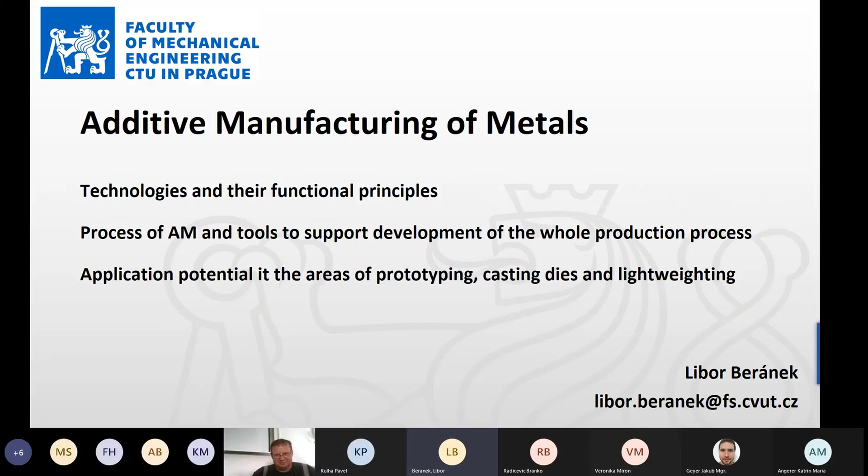Can you see the presentation correctly now? Yes, we can see it well. I had to start the presentation with something maybe a little bit controversial, but we will be celebrating almost 100 years of history of metal 3D printing...

Even if we don't think so, because 3D printing is perceived as something very new, like 10 or 15 years of history. You can see that the first patent regarding 3D printing, of course they didn't call it 3D printing back then, was in 1926. It was a patent aimed at the use of an electric arc as a heat source to generate 3D objects, depositing molten metal in superimposed layers.

This emerged during the time of the construction of skyscrapers in the United States, because the workers spent their whole day there, and the trip to the highest floors took them maybe half a shift. So they figured out that they would basically be living there for quite a time, and because they were welding all these big constructions, they became quite skillful.

They figured out that they could use this welding technology to make 3D objects by placing individual welds where they needed it. They basically made some teapots and stuff like this. In principle, we use these technologies today too, maybe in a more advanced fashion, but I wanted to start this way to show that we didn't revolutionize anything — the skill was already here.

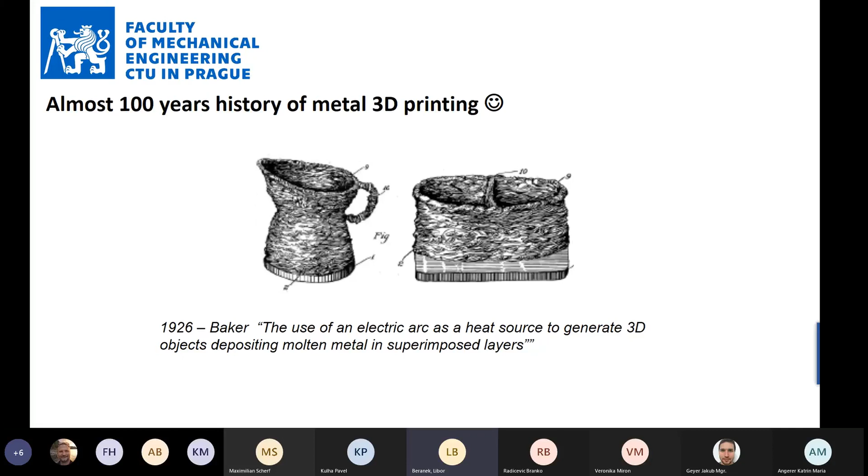If we're supposed to differentiate between the technologies, maybe the biggest problem is that the development in 3D printing, or additive manufacturing, is so quick that there are technologies emerging maybe each year or each few years using new principles. Sometimes they even use the same principles but just bear a different name, basically as a result of marketing purposes. But regarding metal 3D printing, we can start with a different source of the material we can purchase.

We can start with wire, which is a very common material from welding. The technologies connected to it are directed energy deposition, where we can point the wire at the place where we need to add material, and then use different energy sources to melt and weld it. Different energy sources mean we can use laser, plasma, electron beam, or traditional arc technologies like metal inert gas or metal active gas. So this is one way where we can get to metal objects.

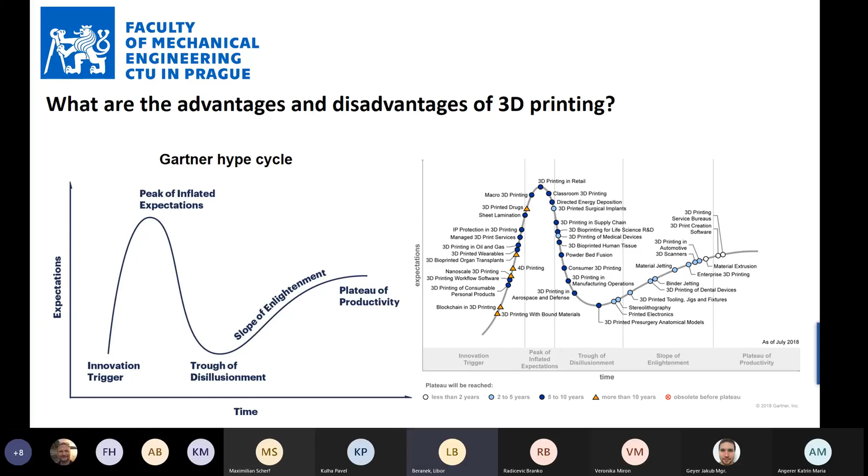Today I would say we are quite certain that additive manufacturing is another production technology, and it will be here with the other production technologies for years to come, and it will not be able to replace those. There are a few aspects that are very problematic to solve regarding 3D printing, maybe even impossible.

What is the biggest advantage of 3D printing? When we take a 3D object, which is quite complex, but we cut it into two-dimensional sections - basically we cut this very complicated object with 2D sections - we will get very simple images.

This is something that I made with my children at home. So we started with 3D printing quite early. The basic principle is that we can reduce this complexity in 3D into two dimensions, where the object can be easily made by just movement of two axes when it's FDM or DMLS technology, or with one picture if it's, for example, SLA or DLP technology for polymers.

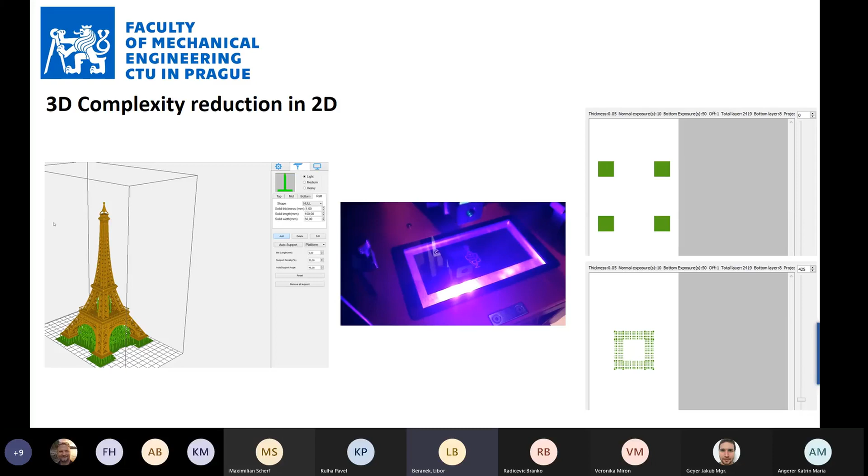So this is a great advantage of 3D printing - that the complexity of the part is not such an issue when we are calculating the price of the product. So we can have quite complicated parts and the production costs will not be so expensive.

But we have to see also the other side, that there is a very limited room for cost reduction in additive manufacturing because of the production times. Usually the production times are on the level of hours.

When we are discussing printing metals using powder bed fusion, some of the prints we made were 70 hours, 120 hours. So we are discussing days or sometimes even weeks of process. And then the depreciation costs are quite significant costs for the part price itself.

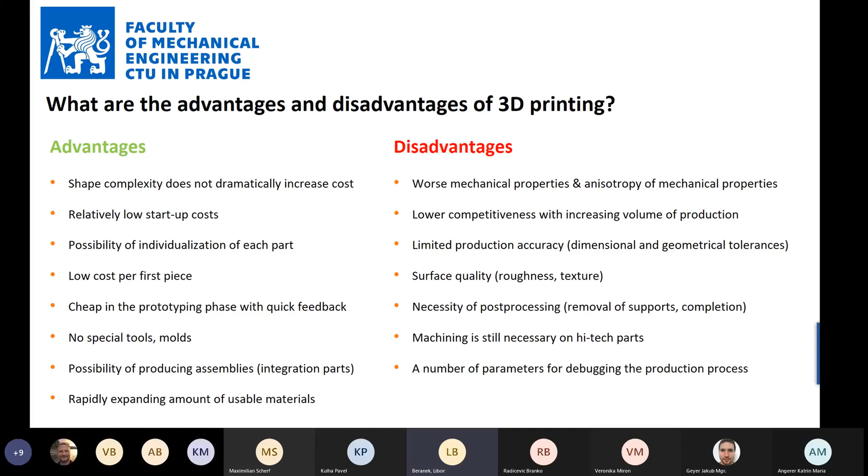Regarding the process of 3D printing, I'll go through this fast, because with 3D printing itself we usually see videos of the printing process, but we don't see the other steps. This is quite significant - it consumes time, and you have to pay for these costs somehow.

So the first step is we have to create a model. There are different techniques for modeling, different software solutions. I would just leave it at that.

Then we take our model, which is parametric, and convert it into some kind of format which can be processed by the printers. Today the standard is the stereolithography STL file, and there are few other formats like AMF, additive manufacturing format.

AMF has some advantages over STL, because usually STL is only a triangulation mesh - it describes geometry, but not material properties, surface texture, or color. Since we have printers that can alter material properties and even surface texture today, we needed other formats which can work with more information.

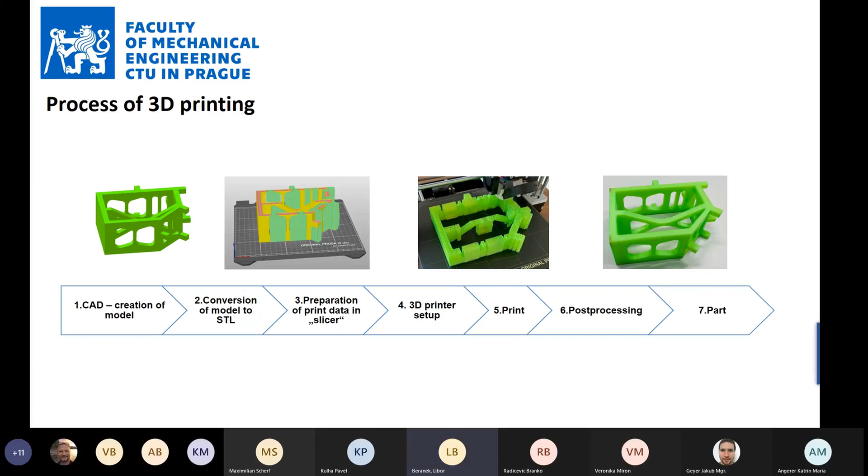I'll go quickly around these steps because this was intended for a very young audience, so this is quite general. But I'll focus on certain parts which are connected to metal 3D printing.

With the printer itself, you're usually working with powder materials which are very small. Those particles are typically from 8 to 50 micrometers, and the majority of particles are somewhere around 30 micrometers. At least this is the powder distribution we use in our printer from GE Additive.

Because of the size of the particles, you have to take some precautions. This is something you sometimes don't see in the videos - there are people in suits working with a 3D printer. It's not too safe to present it otherwise, because the materials themselves are causing health problems.

Today we know that they can cause cancer, so you have to protect yourself properly with some kind of equipment - protective equipment.

So during all the preparations and all the removal of the part from the printer, you're basically working with some breathing system, with some kind of protection, because you don't want to be in direct contact with the powder.

Then there's another aspect. A few of the materials, typically materials having a portion of aluminum or titanium inside - so typically aluminum alloys or titanium alloys - are so-called reactive materials, meaning their surface area is quite large when in powder form.

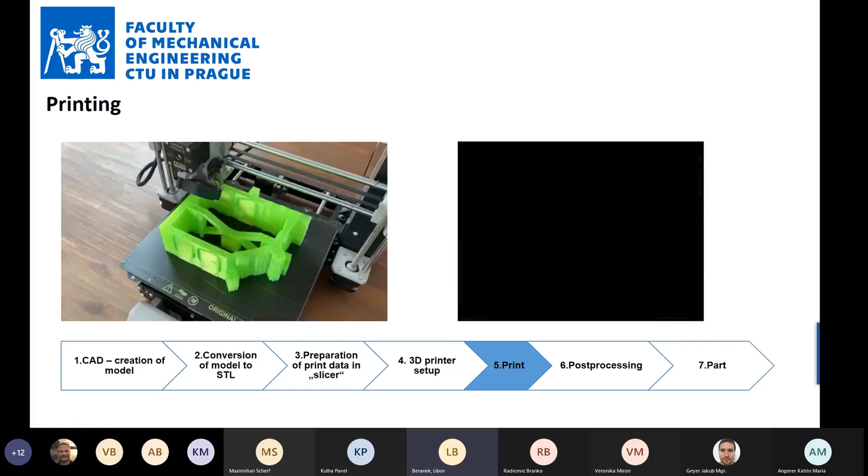Now you can see the so-called recoater. It's basically a mechanism which takes the powder from the powder container and spreads it with a certain width. Usually the building height we use is something like four hundredths of a millimeter or five hundredths of a millimeter, 0.05 millimeter.

The printing process is usually advertised as really easy, but then comes the post-processing, and we already have some experience with production parts made by 3D printing - usually this is the crucial point of the process. If you have correct design, if you've simulated the printing and so on, this is still only half of the way, because then you have to finalize the part. In my opinion, this is something universities are not so prepared for.

When speaking about prototyping production, you don't have a room for automation, a room to make fixtures, to do CNC machining, usually because of the price of the part. So you have to do this manually, and this is something which is lacking, or which we don't talk about enough. When you think about 3D printing, you think about an automated process - you take a model, put it into the printer, and the final part comes out.

Basically you don't need a skilled operator or skilled worker for anything - or at least this is the general perception. But because the part comes out welded to the platform, at the final step of production you now have a human factor introduced there, and usually this can be quite, I would say, fatal for the product itself.

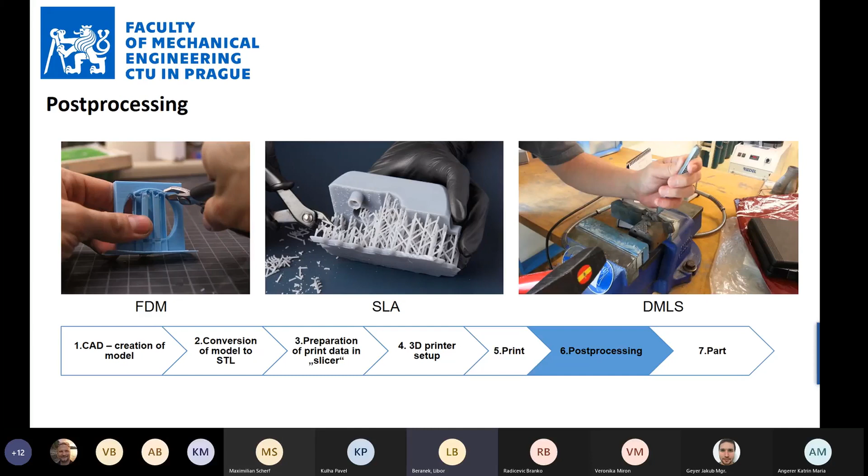Usually students, or when you have a lack of experience, you are very familiar with the software, with different tools which help you prepare the build-up, but at the end you have to take manual tools in your hand to finalize the product, and this is usually a place where you can destroy the whole part, where you can waste, I don't know, a week of printing time. This is something not considered very often, I would say.

So the part finishing or post-processing - this is how it comes from the printer. If the part is a very thin structure, topologically optimized, full of supports, and if you design the supports so they can be removed manually, the operator can clean the part quite easily. But when the part needs better specifications, you're aiming for machining, and the part deformations might be half a millimeter or even bigger.

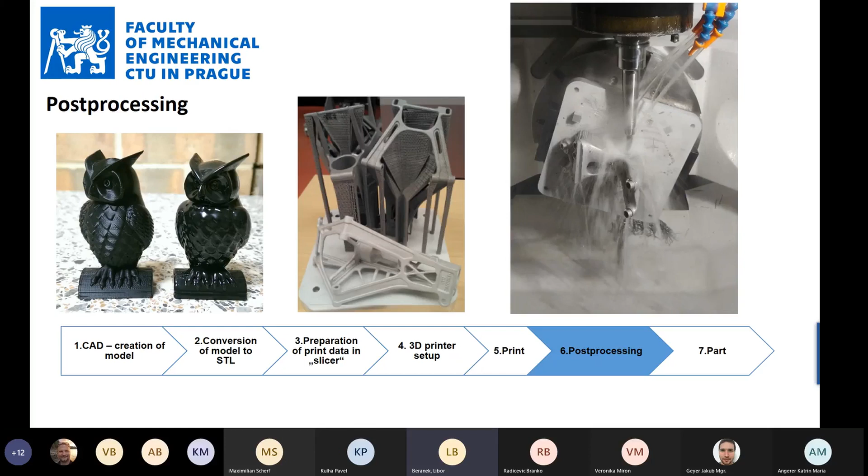And then of course, for the final product, you usually have to inspect it if you want to deliver it somehow.

So this is the general process of 3D printing, and this is what we are trying to offer at the university, at our department specifically. We want to have the whole production chain of additive manufacturing, offering this to companies. We are able to design the part itself using different techniques, including topology or lattice optimization, and we have tools to predict the outcome of the simulation.

We can analyze deformations, potential failures, and collisions with the recoaters. These are typical tasks you simulate, and you can use these results to change the geometry, basically trying to invert the deformations within the geometry. Then you have to prepare the build regarding positioning of the part, generating supports, and so on.

Within metal 3D printing, the supports have one very important property. Not only do they support the structure like in other technologies, but the powder material has very low thermal conductivity, acting basically as insulation. So places surrounded only by powder material can be overheated quite easily. But the supports have the same thermal conductivity as the aluminum part.

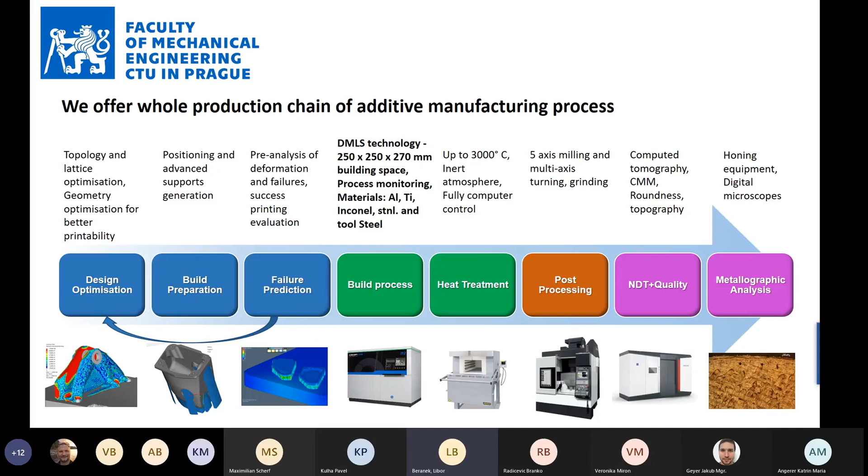Then of course we have quite good equipment regarding dimensional control, surface texture, and non-destructive testing. We can use CT today to see the external geometry, internal geometries like lattice structures, and we can also analyze porosity very quickly.

For available technologies, we have a lot at the university, but for metal printing specifically we have a TruPrint 1000 and a Concept Laser M2. The TruePrint is a smaller printer dedicated to AISI 316, an inox alloy, and the M2 uses DMLS, serving different materials since materials can be changed fairly easily, though some parts need to be replaced when changing material, which can be done quite easily.

So we have printed hot work steel, precipitation hardening steel, aluminum alloys, even titanium alloys, and nickel-cobalt alloys. So we have printing parameters for various materials which are qualified.

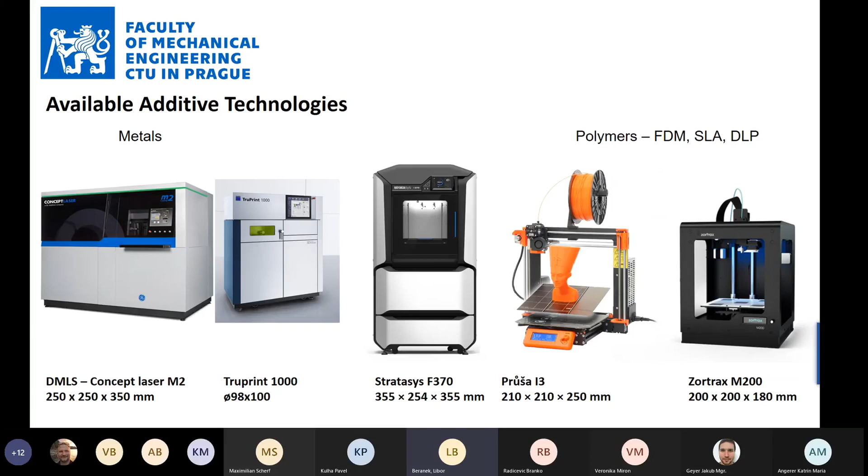Then we have a lot of polymer technologies, which I would skip. We also have some special technologies for additive manufacturing of metals which are not based on the powder bed principle. One is based on wire and arc additive manufacturing - you can perceive it like MIG welding on a robot or some kind of portal. Then there's plasma transferred arc, PTA technology, where you can combine materials with quite different melting temperatures. For example, you can use nickel alloys, cobalt alloys, and mix them with boron, tungsten, and materials with very high melting points. Using plasma, you can make quite resilient surfaces or structures on some kind of material which is usually cheaper.

Then colleagues here from the university developed a hybrid technology called Weld Print, which is basically an integration of wire and arc additive manufacturing into a 5-axis milling center. In one step they can weld the part, with a productivity of about 6 kilograms per hour - quite a big deposition rate for 3D printing. So you can place a lot of material and machine it into the final specifications within one technology. This is called a hybrid technology because it provides both additive and subtractive manufacturing.

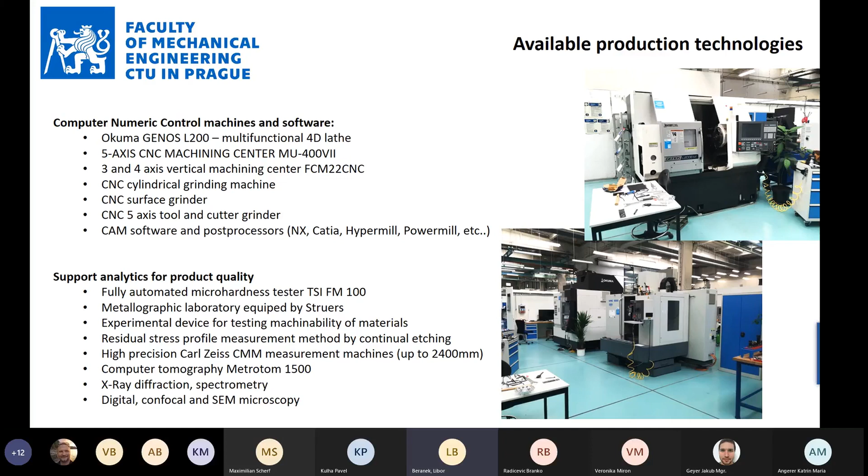Then, of course, regarding post-processing technologies, we have other equipment used to finalize the parts within specifications. This is part of the strategy I mentioned - we want to offer the whole production chain, not only the print itself, but also the preparation stage and the finalization stage.

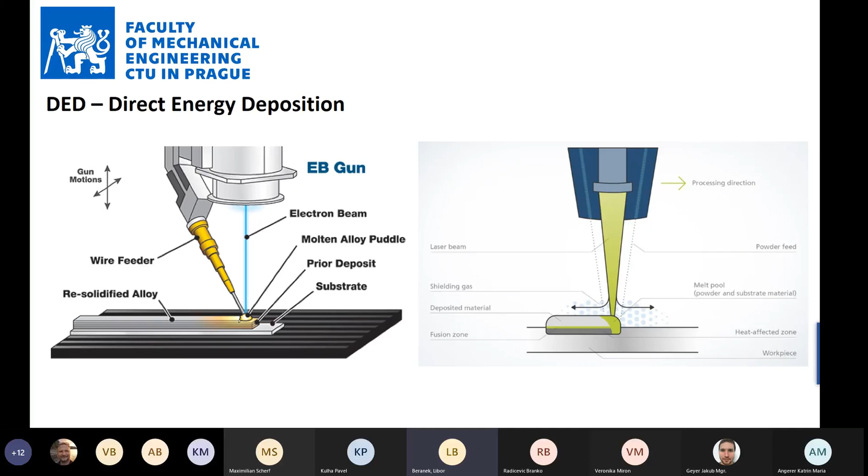Powder bed fusion we have already discussed. Now I would aim for the application, and the difference between direct metal laser sintering and electron beam melting. This technology has a lot of benefits over direct metal laser sintering, because in the aerospace industry, maybe the first aspect they need to solve is material properties. When printing reactive materials like titanium alloys, typically for compressor blades, they value the fact that you can use the electron beam only within a vacuum, and the vacuum itself protects the material. This is one aspect which is quite good about electron beam melting.

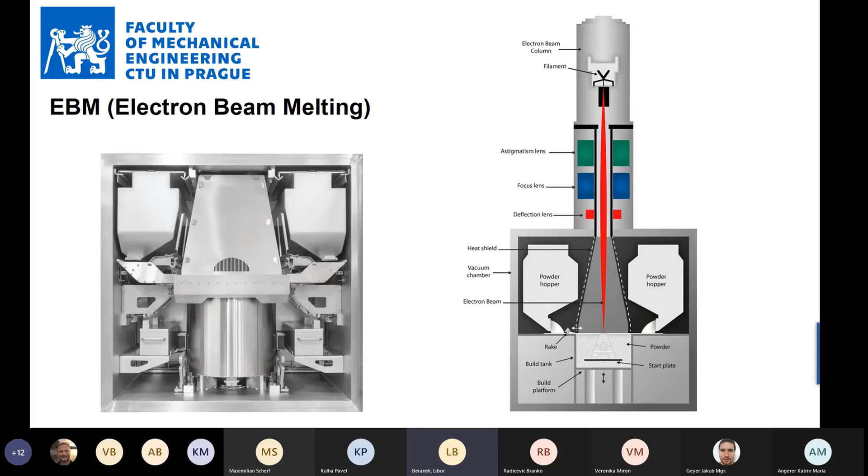It has better precision when you compare form deformations, because deformations are minimized by the preheating. But again, the surface finish or surface quality of the part is much, much worse. The surface roughness parameter RA is usually double or sometimes even triple that of the DMLS technology, so you have to spend more time finishing those parts. This also comes into consideration.

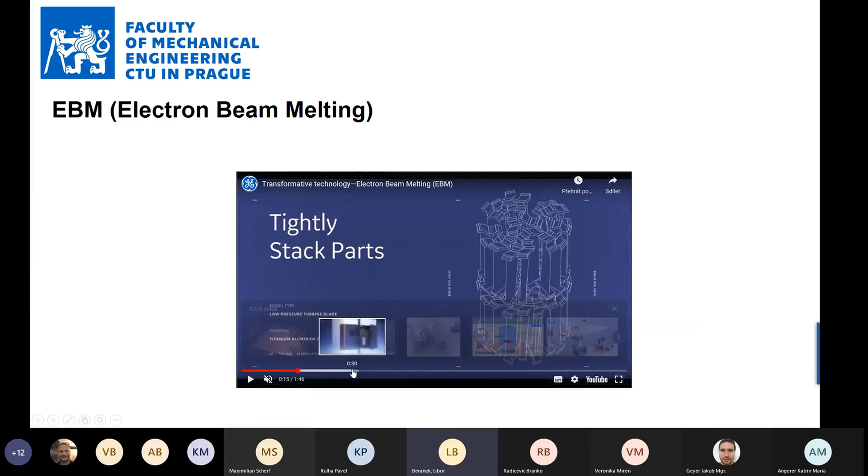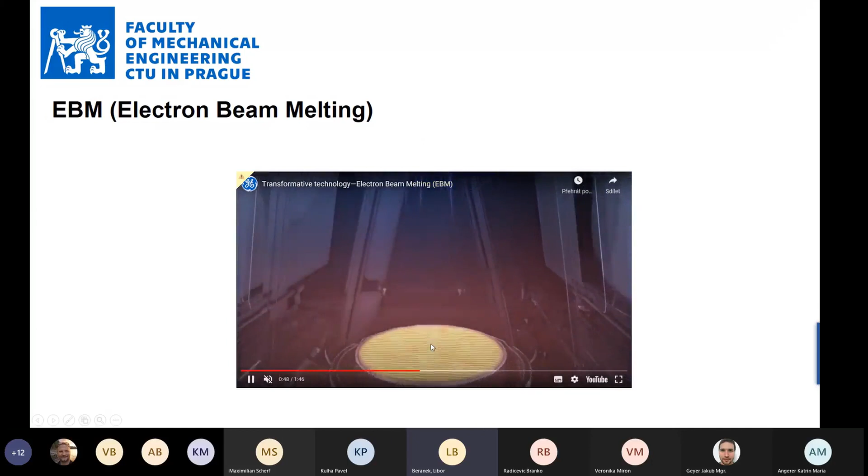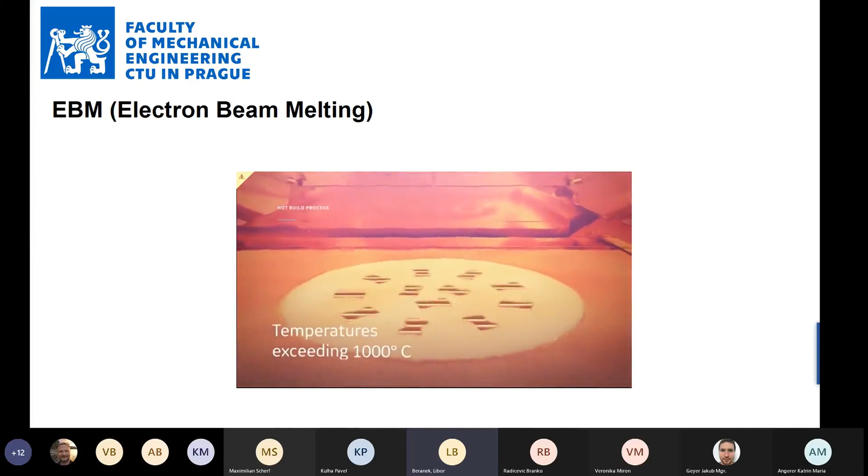You can see for the electron beam melting - if you are interested, I will give you this presentation. But basically, the great advantage is that you really have multiple focal points at one time, because it's very easy to split the electron beam using a magnetic field. So you can preheat the whole bed and then do several parts at once, making the technology very productive. But on the other hand, you are working with vacuum technology, and you need quite a big vacuum, so the maintenance costs and so on have to be calculated and considered.

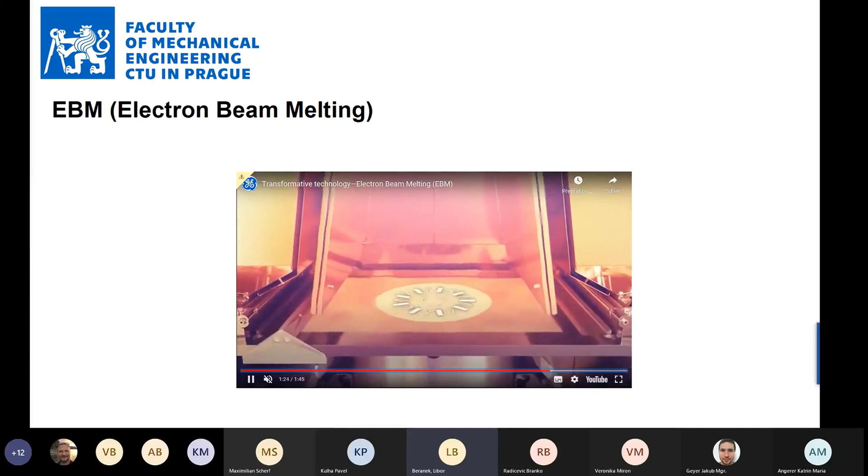Focus of our team is basically we are trying to transfer the whole know-how about the process from the design phase up to the inspection phase into the industry.

So these are some parts that we have made historically. I would say usually you see the final part, but barely see the parts right away from the printer.

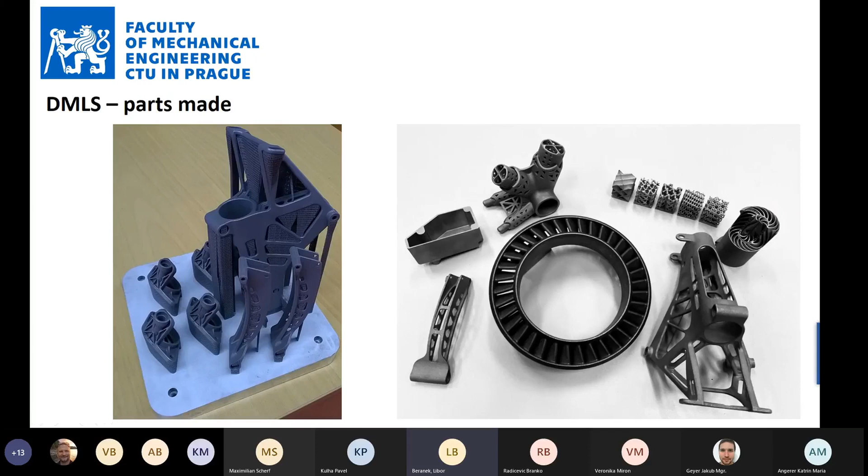You have to consider that usually when the print finishes, this whole powder bed is basically at the bottom of the building chamber and it's full of powder. So only the cleaning of the build plate like this takes you 1 hour, and you are 1 hour within the protective suit. And it's a job, again, very human dependent.

Regarding the simulation or prediction of failure, this is something that comes into play when you have asymmetrical parts or parts with very thin walls, because usually the most common problem is that the thermal history of the part will deform it, causing it to rise above the powder bed.

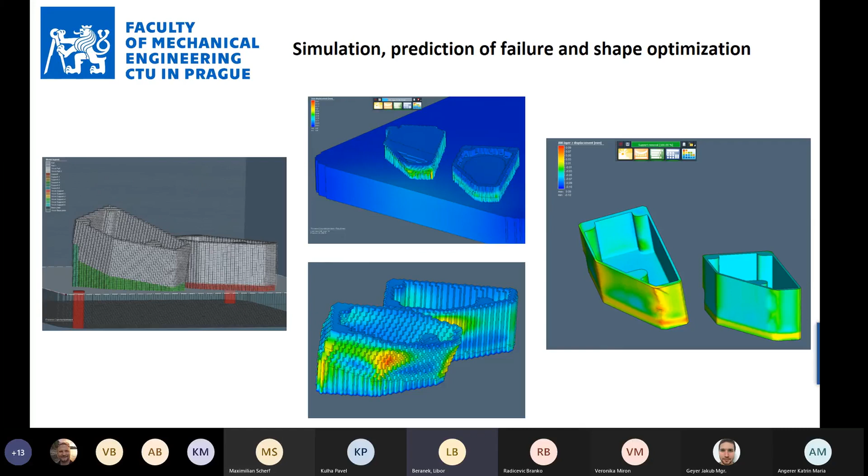This is the moment where you can easily have a collision with the recoater system. So you have to be very careful that the part deformation doesn't exceed a certain limit, and that these deformations don't come out of the powder bed, because then they will be higher than the level where you're printing, where you're moving with the recoater, and you can easily hit it, causing a mechanical collision of the production tool.

Regarding inspection, as I mentioned, CT is a very productive technology which can help you gather information about the outer shape, and also helps you inspect inside the part without destroying it. So it's a typical technology for non-destructive testing.

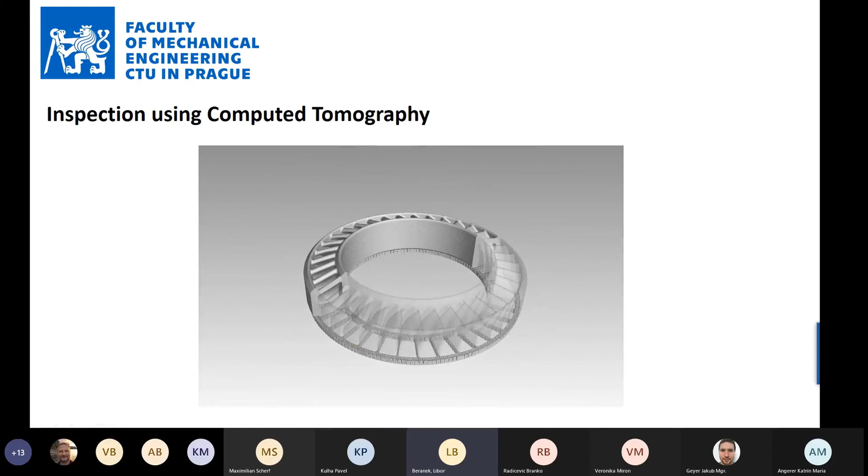Also worth mentioning, all printed parts have some kind of porosity. Usually we are at a level under 0.1% porosity. But when the printing parameters are not set properly, you can be not at 0.1%, but at the level of a single percent or sometimes even higher.

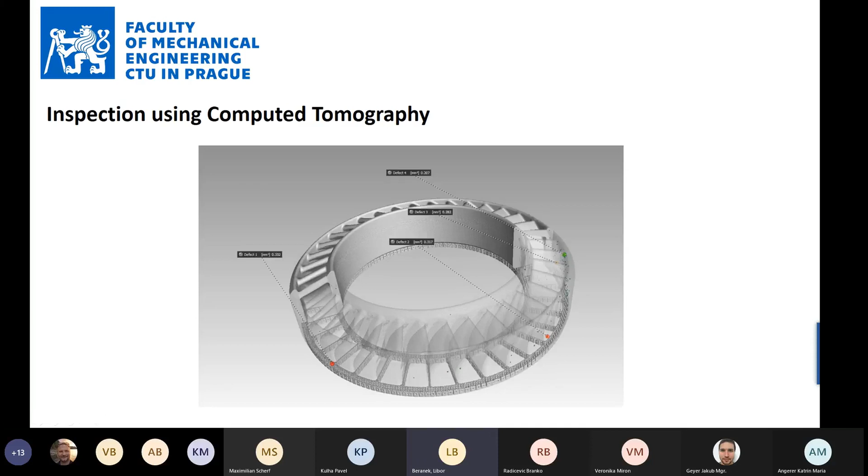So this is SE10 Mg alloy. You can see the porosity and defects here, because we printed it quite fast, so there are pores within the tenths of cubic millimeters.

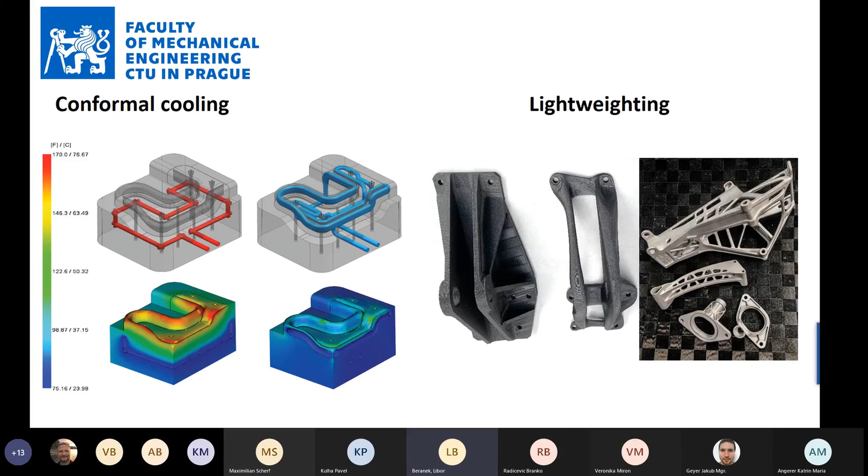Regarding application, there are two areas we are aiming at: conformal cooling and lightweighting. Lightweighting is for aerospace or car racing. Conformal cooling is for injection molding or high pressure die casting.

Within Škoda Auto, we have some history of developing inserts into the molds to prevent porosity problems. So this is basically the conformal cooling inside an insert, which was placed within one part of the mold. This is a quarter of the mold for the engine head.

And the next step, I would say, is this complete piece of the mold. This is 1/4 of the mold already made with 3D printing, with conformal cooling, and already with some experience from application in serial production.

And we can say that this has some disadvantages over traditional materials. The porosity of the printouts affects the lifetime of the part, and you have to think about it when designing the conformal cooling.

You have to think about how to repair it, in certain inspection periods. So you can make very complex cooling channels, but then you have to also think about the possibility of repairing these channels.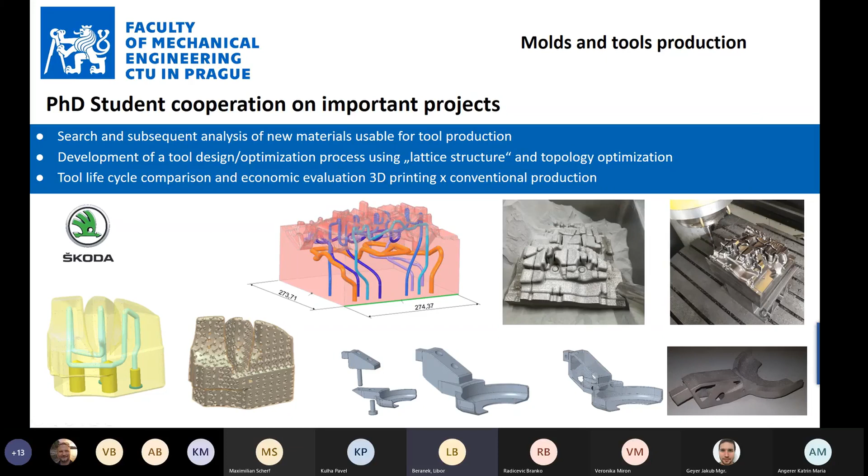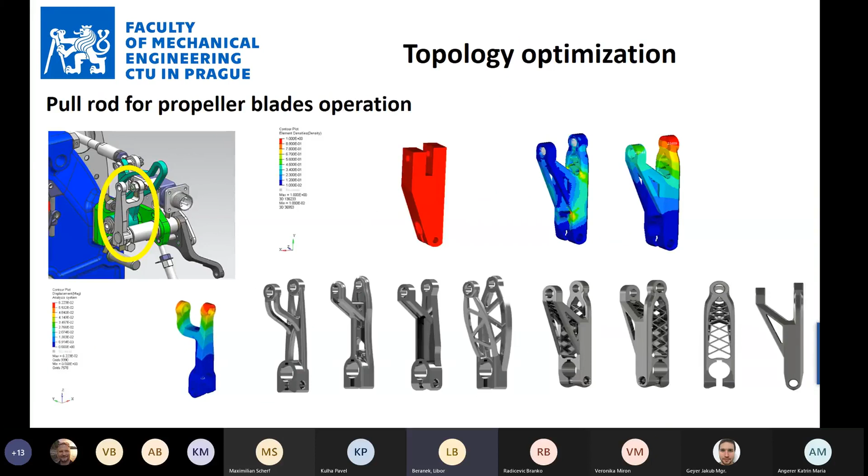So this is basically everything from my lecture. If you have any questions, you may ask. I have also prepared some models for economical calculation, but I'm not sure if you are even interested in that. So I would like to ask you, if you are interested in anything, you can ask freely.

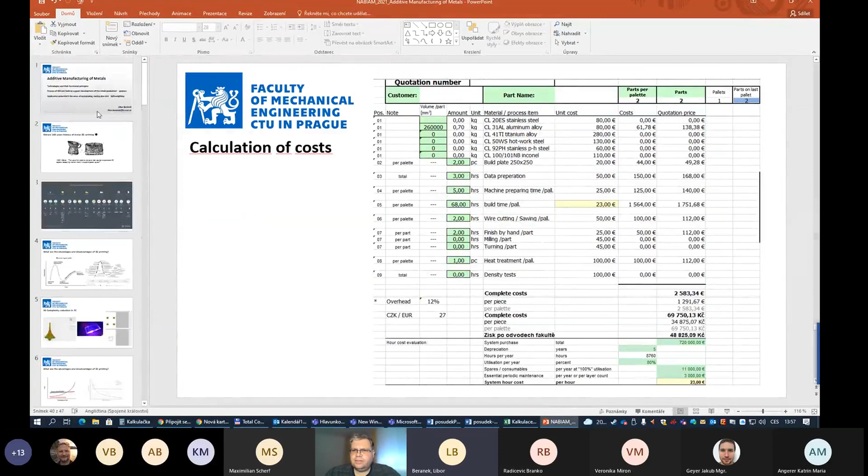Yeah, there is one from Jakub from the University of South Bohemia. So Jakub, please.

Okay, so first of all, thank you for your presentation. And actually, I have several questions prepared. However, since we are a bit behind schedule, I will limit it to just... sorry for that, sorry to my colleague.

So first, I'd like to ask, because in plastic additive manufacturing, it is often said that we are basically a bit behind schedule, like 10 or 20 years. And usually manufacturers said that they had to wait for some patents to expire to be able to produce machines for, let's say, hobbyists or even for the industry. So I would like to ask if there is something similar with metal additive manufacturing. If there are some limitations regarding patents, or if we are still waiting for some patents to expire, or how is the situation about this?

Well, take this as some informed opinion, maybe it's not true, but regarding the polymers, basically it's all about the heating of the chamber, and this was patented by Stratasys, and I would say that patent finished something like 5 years ago. So now a lot of producers can make, I would say, heated room or heated printers, which is much better for the quality.

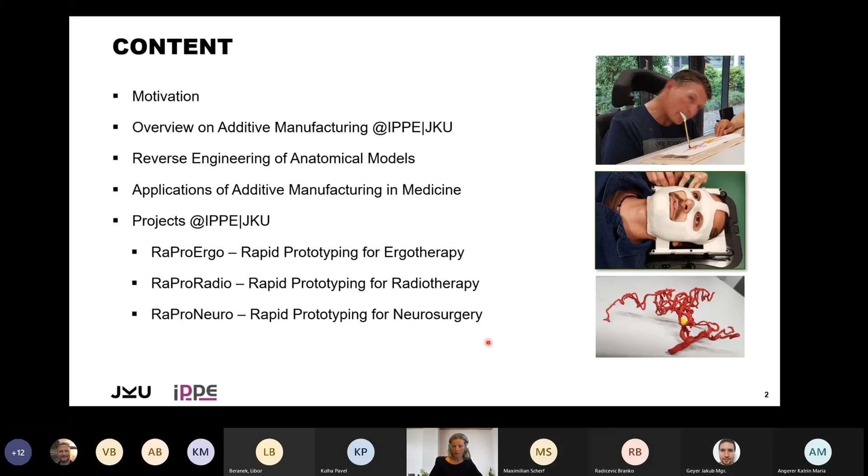Main advantages we already heard, but as a repetition: for us, mainly the high design freedom is the beneficial aspect. We can create free-form shapes. When we talk about medical applications, we have human anatomy.

When we look at this blood vessel of a brain, if you think of conventional manufacturing techniques, there is, to my knowledge, no manufacturing technique that would be able to produce this, as you see it here, printed in one piece. As we also heard before, a lot of support structure was removed there.

This high design freedom and the freeform shapes allow us to talk about personalized medicine in the future. Toolless production can reduce the cost for prototyping and also production of small series. It can even shorten time to market for product development, and it can also shorten production time itself because you don't have to wait for the tool to be manufactured.

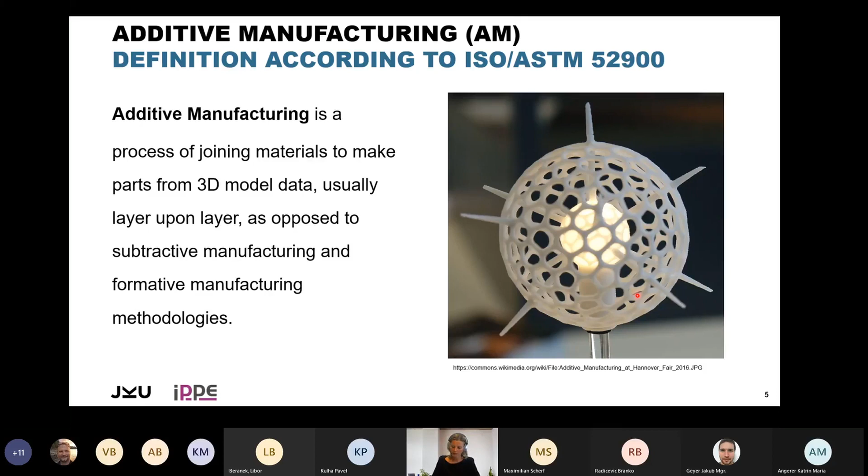And you see here again this complicated shape that you wouldn't manufacture otherwise. So additive manufacturing really has very special applications in this field.

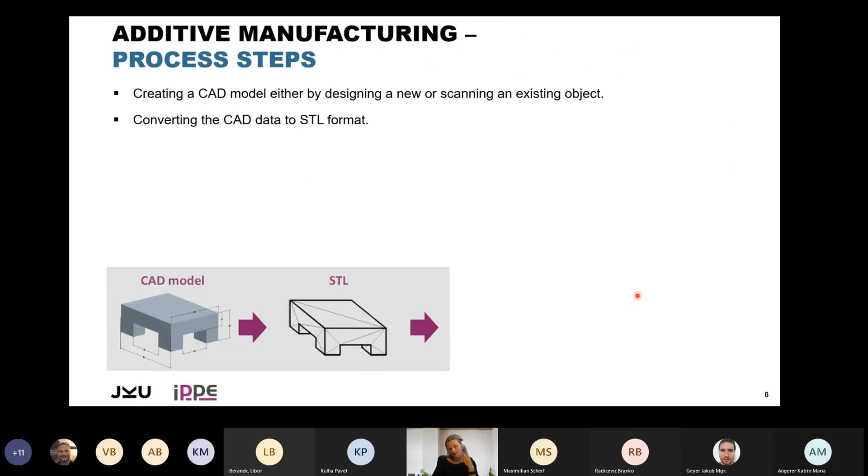The process steps we already heard, so I will just quickly go over them. We have our CAD model. We need to create a printable file, the STL file—standard tessellation language—and then we slice it into thin cross-sectional layers.

Sometimes we need to create support structures. In FDM, sometimes it's possible to also print without support structures. And then the building is happening. And of course, as mentioned before, a lot of post-processing in some cases.

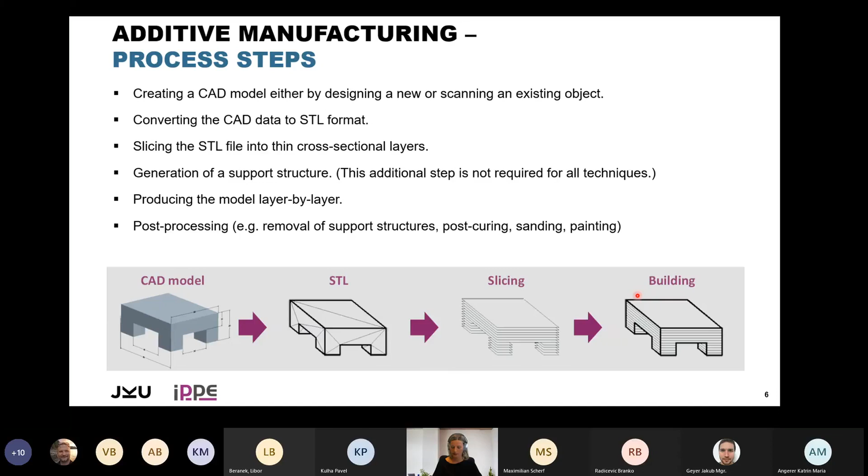Removal of the support structures is one thing, but also for photopolymers, post-curing is often necessary, and in general sanding and painting to get the surface quality you desire for your small series or prototype.

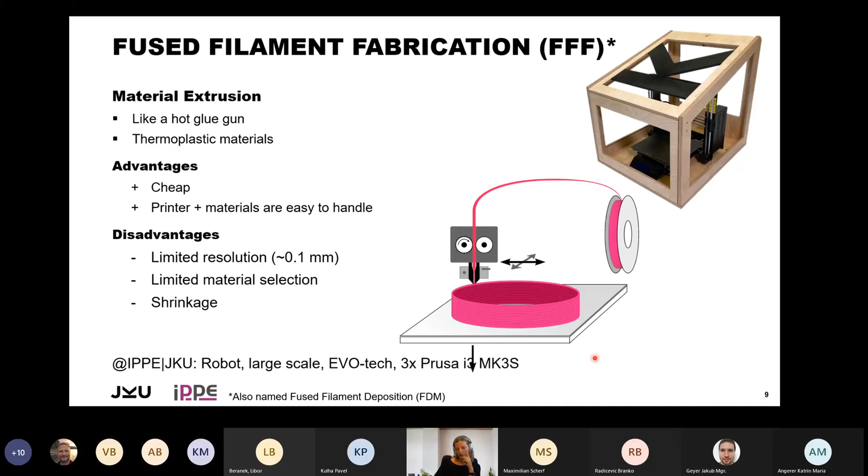Selective laser sintering - I think before it was quite well described. It's not so much different from metal laser sintering, just that we need way lower temperatures for melting polymers. So again, we have this roller that applies a layer of polymer powder, and the laser that melts the powder where the part should be.

And with this technique, basically polymers, metals, and ceramics can be printed. From the polymer side, the options most commonly used are polyamide, polyether ether ketone, and also elastic materials - this is thermoplastic elastomer, usually thermoplastic polyurethane.

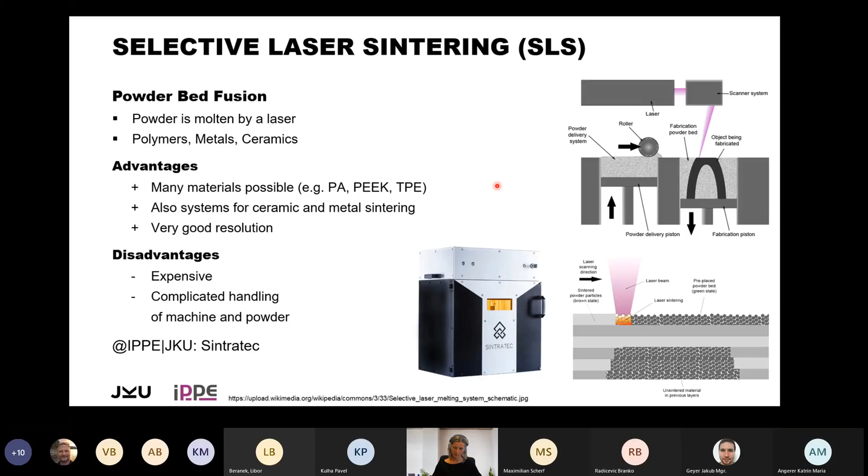The resolution is usually better compared to fused filament fabrication. The disadvantage is it's more expensive, and a lot more complicated in handling, as we heard before, with the protective gear. We have only a small selective laser sinterer in the lab from the company Sintratec.

Very nice show models can be produced with stereolithography. It's UV initiated, cross-linking with a laser, or in our case with an LCD screen.

Basic material is a photopolymer, usually acrylic photopolymers, but I'm sure at Profactor there are people that know a bit more about those. The advantages are speed—they can print very fast, and we have very good resolution. That's because coming from a liquid, you always have better resolution than when you come from solid, because the limiting factor is the wire or the powder corns, and here you only have liquid that can be deposited in a very thin layer on the bottom, for example.

The disadvantage is it's quite expensive still, though there are already lower cost photopolymers now available. There is limited material availability, not that many producers compared to filament, where there are a lot of manufacturers already. And I personally don't really like the mechanical properties of these photopolymers, because they are subject to a lot of creep. When you need a model for a longer time, or when it's under mechanical loading for a while, you see the deformation quite quickly.

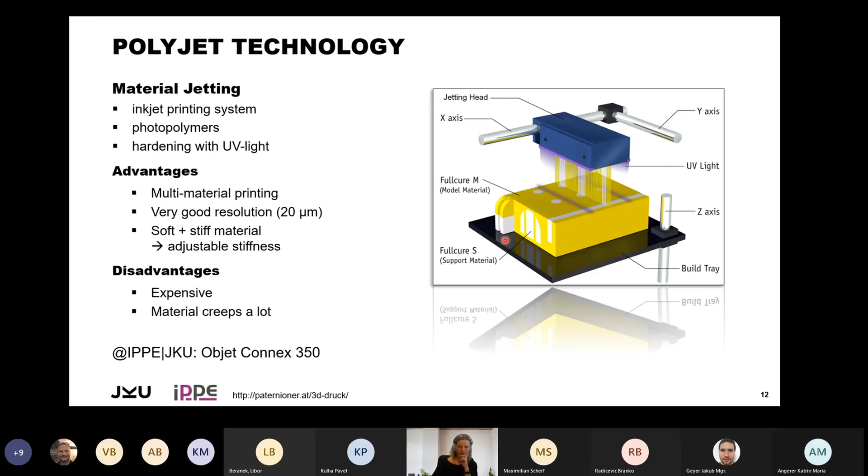So the advantage clearly is the multi-material printing with very good resolution. Objet says that they offer 20 microns resolution, and you can combine soft and stiff materials. The disadvantage is the printer itself is really expensive. You also have to use the materials provided by this company, so it's also expensive. And the material, again, it's photopolymer, so for mechanical applications you always have to keep in mind that it creeps, and design accordingly or use another material.

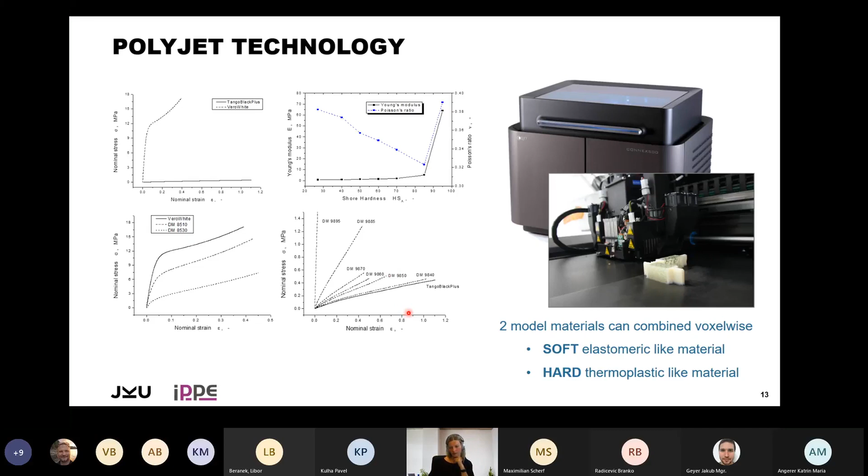Okay, now we come to the last printer I will present: our self-put together silicone printer. We use material extrusion as a basic principle. We can print one component and two component silicones that are cross-linked with temperature. We have a pneumatic material feed, and we use a commercial print head from Viscotec GmbH, the vipro-HEAD 3/3, with a continuous piston system.

Advantages are we can print with silicones, so they can be very soft to a bit stiffer—they are very versatile material. Disadvantages: currently we have still a very rough nozzle, so we print with layer heights of 0.25 millimeters. We need pressured air, but we have it in the lab, so it's not that much of a requirement, only if we want to move it. And because of the temperature, which we induce with a halogen lamp, it's also coming with bright light, but when it's in the case, it's not an issue either.

Okay, let's go to reverse engineering of the anatomical models, because we focus on the medical side today. Before we heard the basic process of getting to the finished part. However, how we get to the 3D part when we actually want to work with existing objects is a process called reverse engineering. So we scan an existing object using photogrammetry, a 3D surface scan, or 3D imaging data, like we know it from the hospital, computed tomography, magnetic resonance imaging, for example.

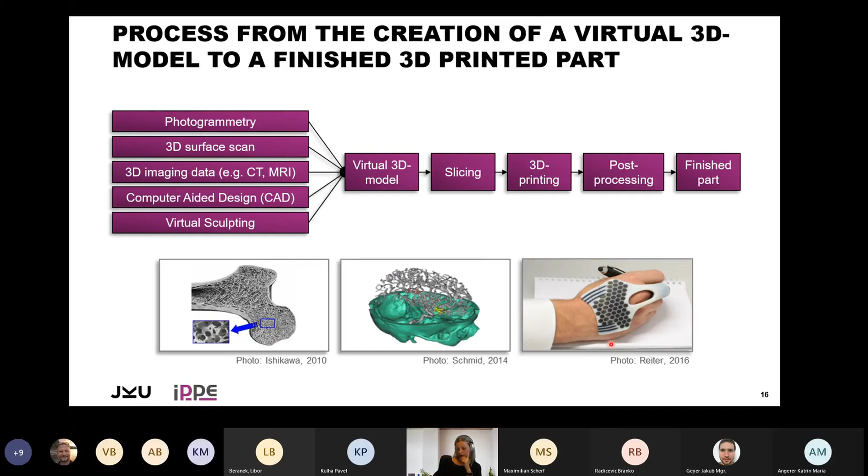Here you see, based on CT data, the skull, and angiography data, the blood vessels, and this is from a surface scan of a hand, but this will be shown later as well. So basically, you see already here examples from magnetic resonance imaging, computed tomography, or angiography data.

Angiography is when you show the blood vessels. And you see with MRI that the soft tissue is well visible. However, with CT, the bones come out very clearly.

So a limitation of this imaging-based design is availability. You first need to get that kind of data. It's usually coming from a patient, or from oneself when you know the doctors and can get the data. And usually there is a risk-gain analysis for the patient behind it.

You cannot just put the patient in CT, and you can also not go there and say, please, I want a very high resolution CT, which might take hours long, because with CT you have radiation that's harmful for the body. So also in basic clinical procedure, you wouldn't occupy a machine for hours just to see if you can get a model out of it. So it's usually done after hospital hours for research.

So it's an availability issue. 2D versus 3D means from an X-ray you cannot create a full 3D model. The contrast medium that's necessary for angiography to get the blood vessel data might also have a disadvantage to use on a patient, so without a reason you wouldn't give it. And there's the recording time already mentioned, which goes hand in hand with the layer resolution and the contrasts.

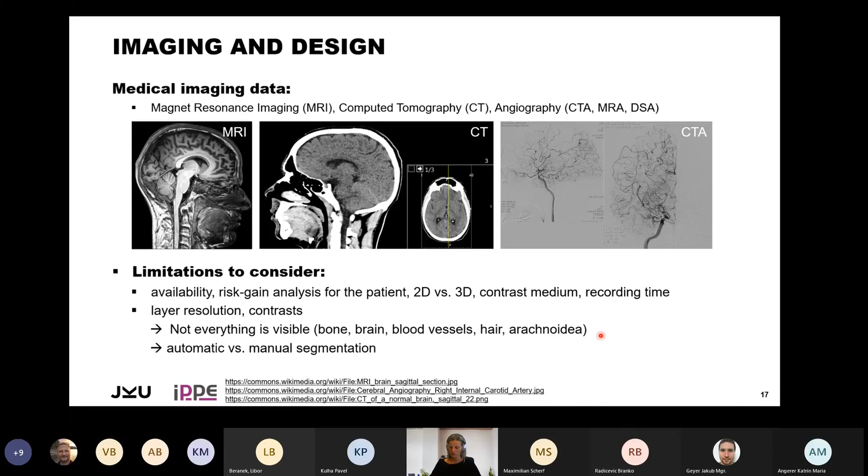We start with bio and drug, just a short overview, because this is really not my topic normally, but for the purpose of not cutting the title short, this is good to hear, and it's usually in the news, so just a short input.

However, not transplanted yet and still very much in research are organs — kidneys, lungs, heart, liver — the full organs. They're very difficult to manufacture because you usually have not just one type of cell, but a lot of different ones, and it's also a complicated 3D structure.

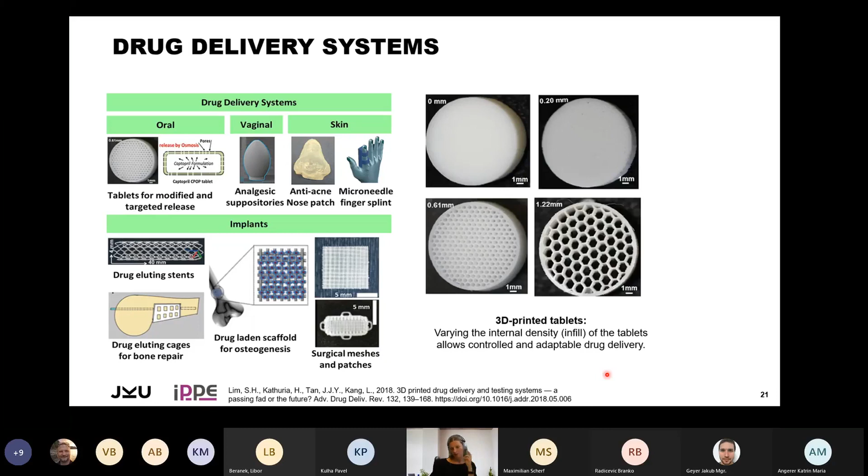And for drug delivery systems, it's also quite a nice application, I would say. The basic principle is that with internal density, because you can change that with a 3D printer very easily, it allows control of adaptable drug delivery. So the more surface area, the more drugs you would be able to release at a time, and it can also dissolve with time. So yeah, a lot of different options there.

Now coming to something I'm more familiar with in everyday life, polymeric printing.

Here's a basic overview: you can 3D print lab and test equipment, assistive tools, orthoses and prostheses, implants, training and surgery planning models. Here the anatomical models come in, and instruments for diagnostic and surgery.

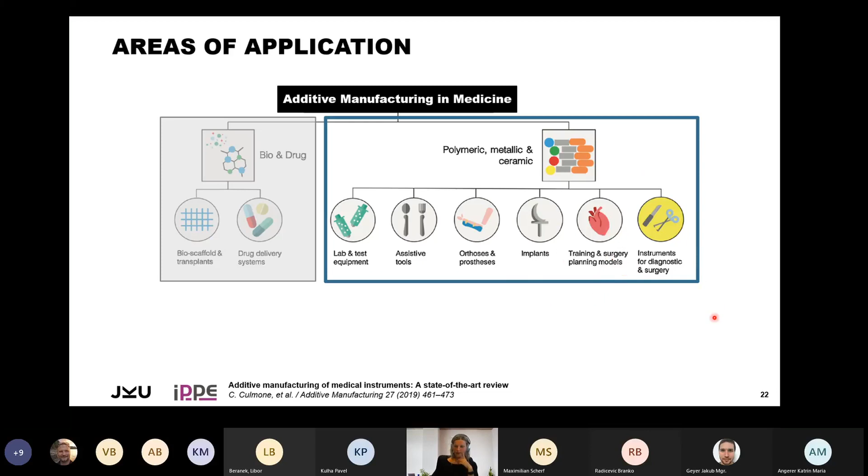Before we saw the Gartner hype curve, which is very interesting, because very far along this Gartner hype curve, really out of the valley of disillusionment already, and very well applied is...

3D printing of hearing aids. This is really a good example of how the technology can be used also for mass production, for mass production of personalized products, because every ear is different, if you need different shapes. The process that this company Widex presents is: they have a standard order intake, scan the model, they do the modeling, printing, mounting, and polishing. It's a very, very standard process and really well applied already.

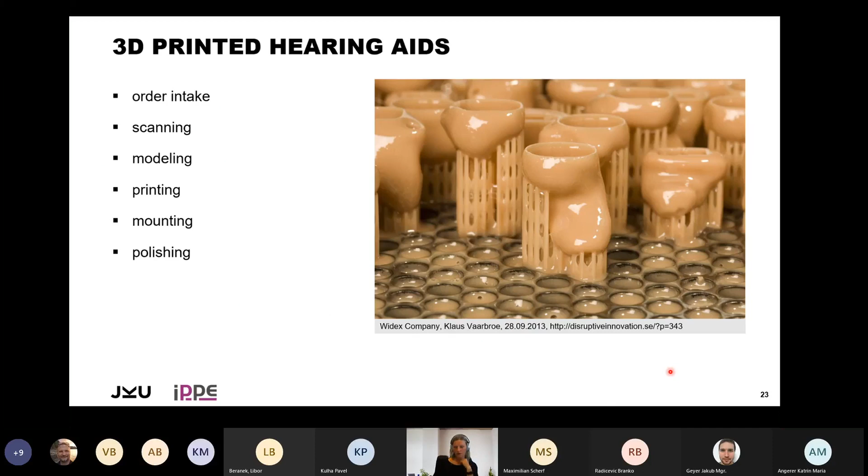The second most common use of additive manufacturing in medicine is printing for dental applications.

Some of you might already be familiar with these transparent aligners. These are not directly printed, but are thermoformed based on top of 3D printed dentitions. Basically, the dentition is virtually changed, and every 2 weeks or so you get a new model. Those are printed, and then the thin aligners are thermoformed on top of these molds. So every 2 weeks, you put the next shape on your teeth, and they push the teeth into the right position.

Also, crowns can be 3D printed. Maybe you can also have implants.

Here, quite interesting, and I didn't mention it in the presentation: there is this very interesting EU project, Inkplant, where Profactor and our institute are, amongst other partners, part of, and the aim is to produce 3D printed implants. One of the use cases is for exactly this application.

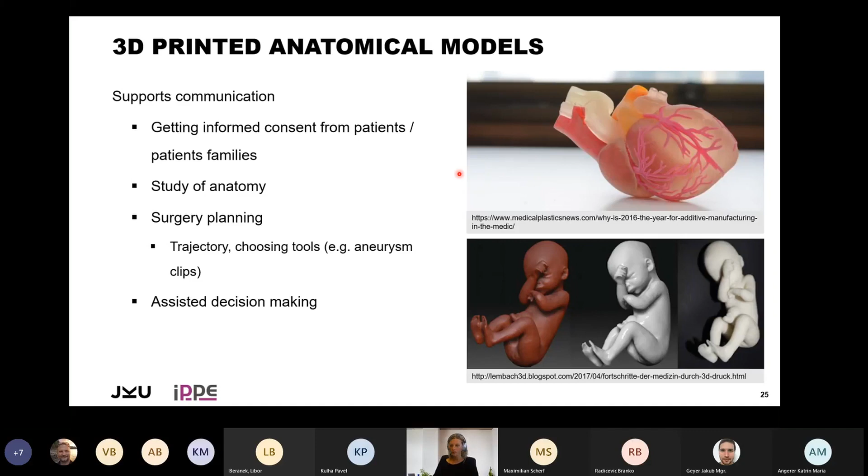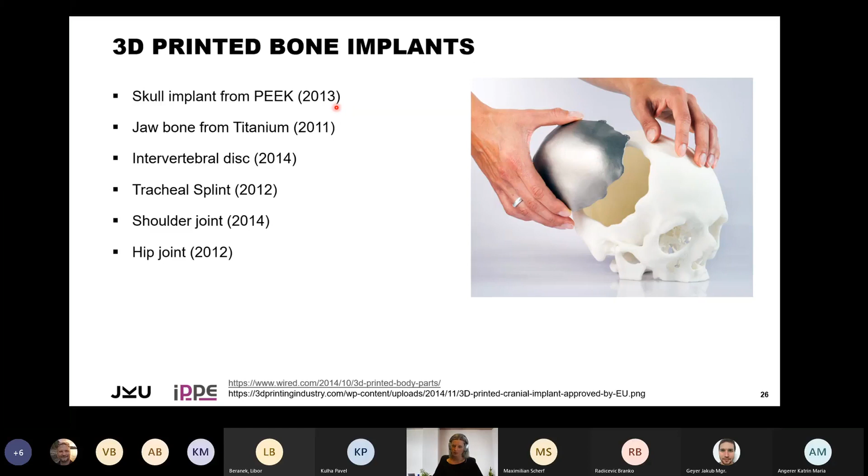I'm sure that with the research going on, there will be more in the future, and here also the implant project comes in.

And for orthotics, this is actually useful when you have a 3D printer at home. In this case, it's a nice story: a colleague went snowboarding and injured this joint.

With a common medical plaster or orthotics, he would not have been able to put on gloves again and go snowboarding again. So what he did is he scanned his hand, designed in some iterations a 3D printable fixation that is fixed with double-sided duct tape and medical tape onto the skin.

And what it does is it hinders the middle finger from being moved, but he can still wear gloves. So it's very lightweight, does the basic job, and actually has some special features, so it also allows the movement of the hand.

This curvature changes all the time when you move the hand normally, so there is anisotropic bending flex features here. And also on the bottom side, you also have some soft material on the inside to have better haptic properties, more comfortable.

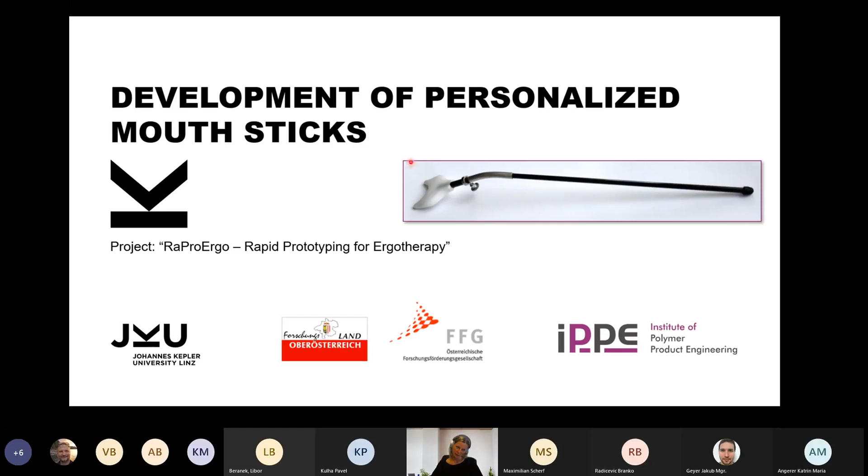Now I'll show you three of our projects. One was the development of personalized mouth sticks in the project RaProErgo, Rapid Prototyping for Ergotherapy.

Basic explanation, what is a mouth stick? It's for people that cannot use their hands or arms, most often quadriplegics, but also when you have spasms, for example. And they're called by the users themselves the Swiss Army knives amongst assistive devices, because they use them in a lot of applications, for example signing, typing on keyboards, touchscreens, turning pages in books or magazines.

Or doing even handcraft like braiding. You see here, one of the project partners actually braided a full basket with this mouth stick. And he's also programming eight hours a day, so really without the mouth stick it would be very hard for him to be independent.

The objective of the project was to find the users' needs, so to really make personalized mouth sticks possible, creating a web-based design tool that the users can use to design their personalized mouth sticks, which can then be fabricated, half automatized. And for this, we also developed 3D printable personalized mouthpieces.

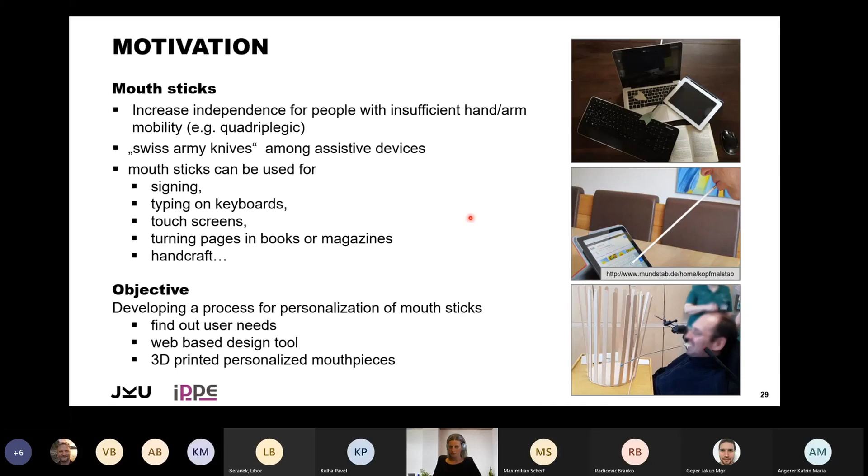Very often I use this basic separation between direct additive manufacturing and indirect additive manufacturing. Basically what it means is either you directly print the mouthpiece in this case, so you have for each mouthpiece the possibility of changing the geometry without creating additional costs. And we did some basic studies for stability.

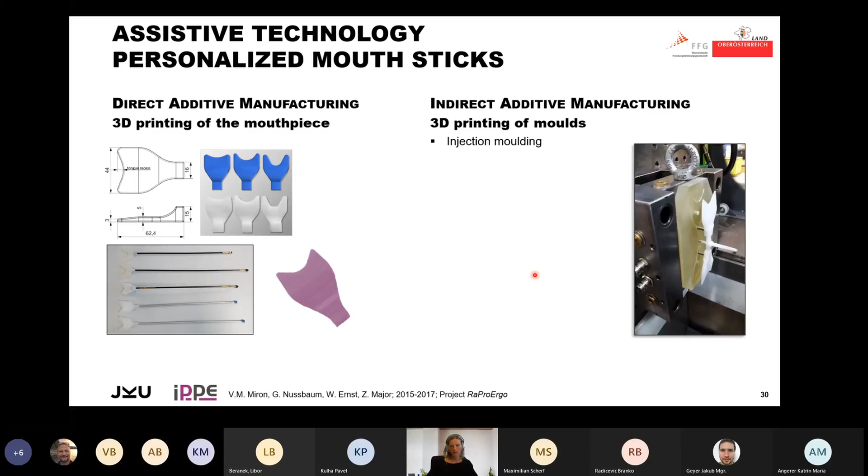For indirect additive manufacturing, it's also called rapid tooling, meaning 3D printing of molds. Here we created an injection molding tool using the Objet. And we also did some manual molding with single material, where the adapter for the mouth stick is already included as inlay. This was silicone used here. The sandwich structure was also tried, with an inside hard structure and outside soft, so sandwich structure molding.

The advantage of direct printing is that you really have the ability to print individual shapes, and as the goal was that each mouth is different, a one-size-fits-all approach was not really applicable. But still, for mass production, as would be the case with injection molding, you're limited to one shape per mold only, because the mold is shaped a certain way, and that's the shape you're limited to.

So the more pieces you want to manufacture of the same geometry, the more the cost balance would indicate that you should make a mold and produce it that way. Also, with the molding, back then we didn't have a silicone printer, so this was the only way to also try silicone as a material. However, that was either way too soft for the people, so they really wanted something different.

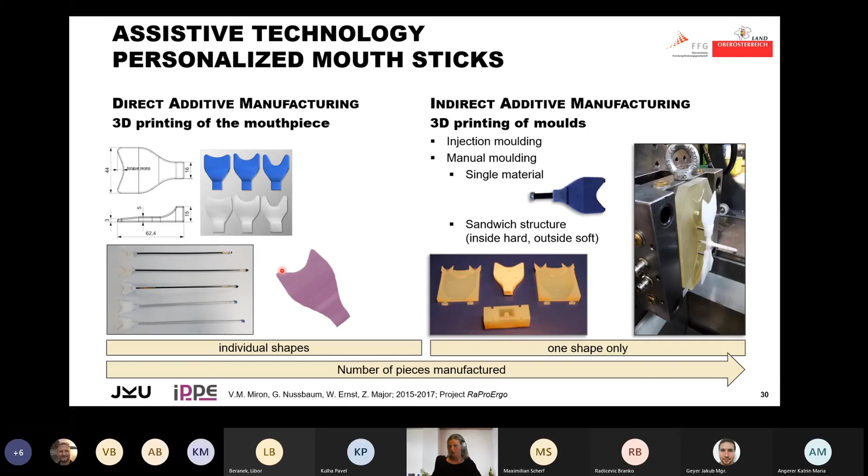Coming to the next project, the development of a non-invasive patient fixation device. It might look a bit weird, but there's a very good reason why in a hospital somebody would be fixed with the head to the table.

During radiotherapy for tumors in the head region, the patient's head really needs to be fixed in position with high accuracy, and we talk about a maximum of 1 millimeter movement in all directions together, because the techniques for targeting the tumor get better and better.

But if the patient moves, you have a lot of region with healthy tissue that the radiation might hit. So as the healthy tissue needs to be protected, the patient needs to be fixed with high precision.

The current process uses this mask, as you see here. You have a thermoplastic mesh, usually a polycaprolactone material that's heated in a hot water bath. It consists of 3 parts on the bottom, and then 2 on top, 1 without holes, and then the mesh. It's thermoformed directly on top of the patient's head, and this can create discomfort during the molding process. The whole process for this type of mask takes about 1 hour. During the cooling and hardening, there's also shrinkage, which patients additionally describe as not that comfortable.

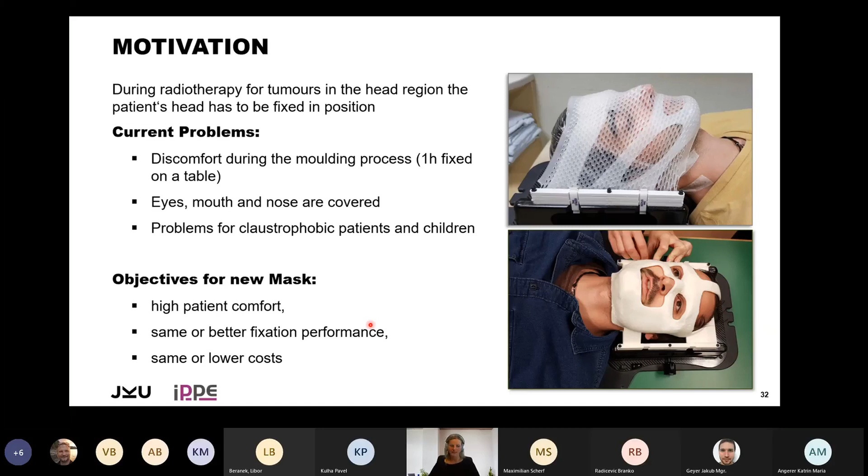The objectives for the new mask are higher patient comfort in the first place, but for the therapy, of course, the most important thing is to have the same or even better fixation performance. And always an issue in medicine is also the cost, so the new system should have the same or lower costs compared to the current system.

We used probands. In our case, we designed the masks based on MRI data, but it could also be done based on CT data. We performed segmentation of the head, then transformed this imaging data, as we heard before, based on the grayscales. We selected the region of interest, and then with polygonization, we got the STL file. Then we did some post-processing of this STL file as well.

Whoever already dealt with it knows what I'm talking about - it can sometimes be time-consuming to do this.

Then we did the designs, as we wanted to make very similar designs. We used templates that were loaded in. The head shell was also imported into several software programs - we used Siemens NX, Freeform from the company 3D Systems, and also Blender for the final smoothing, which could also be done in Freeform, but it's a matter of preferences.

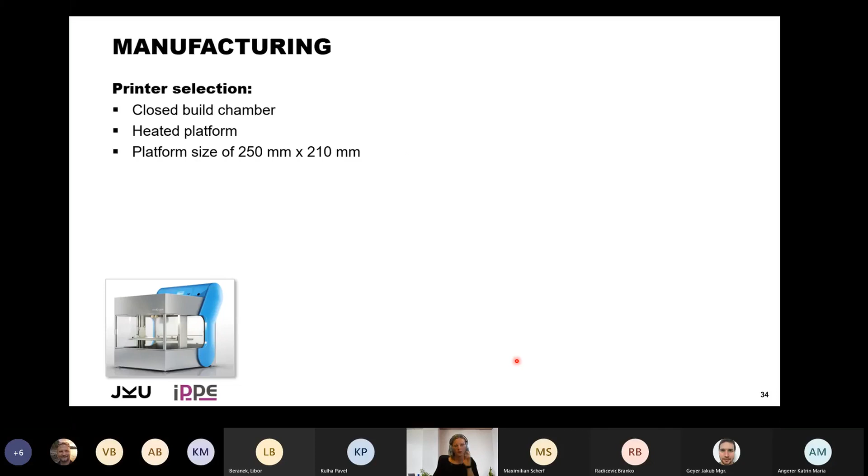For manufacturing, there was a printer selection with a closed building chamber because we wanted to use ABS, as a lot of literature research showed that this is a very good material for this case. It needs a heated platform to print this ABS, and a platform size that's large enough to accommodate this big mask.

The print accuracy was evaluated using reverse engineering with the GOM ATOS system. It was scanned optically and reverse engineered, then overlaid with the original STL, and the differences between the original and the printed file were analyzed.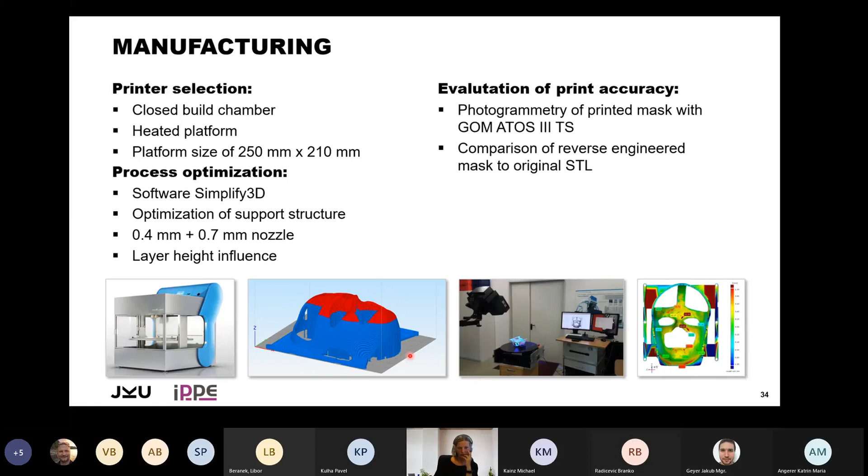For the printing, we did some process optimization to reduce the amount of support structure necessary. As you see, the whole inside here needs to be supported. In this case, we used breakaway support, and the process was also split to reduce the support structure necessary. We did some analysis, as it can be quite rough printing structure for this purpose, which also reduces print time and so on.

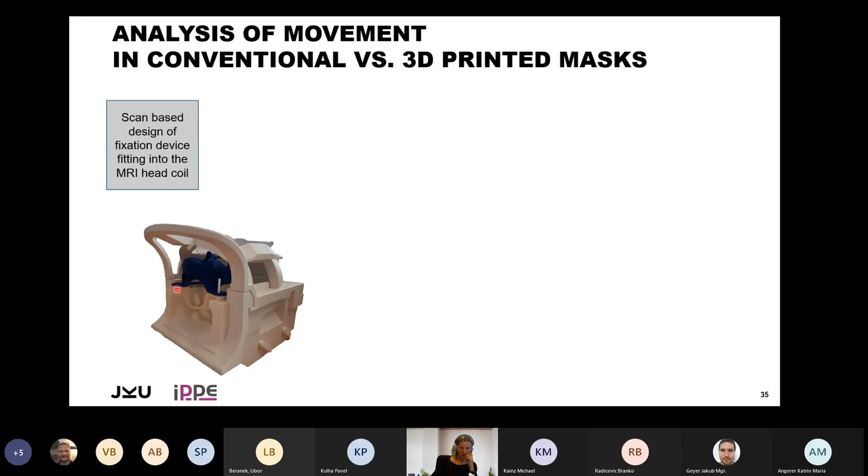What we did then, to evaluate the accuracy, was a scan-based design of the fixation device, and here you see the fixation device that fits in the MRI head coil, because we did the evaluation in the MRI. We used 4 healthy volunteers, 2 male, 2 female, and for each of these volunteers, a 3D printed mask was created, and a conventional stereotactic high precision mask, this net-based mask, was also created.

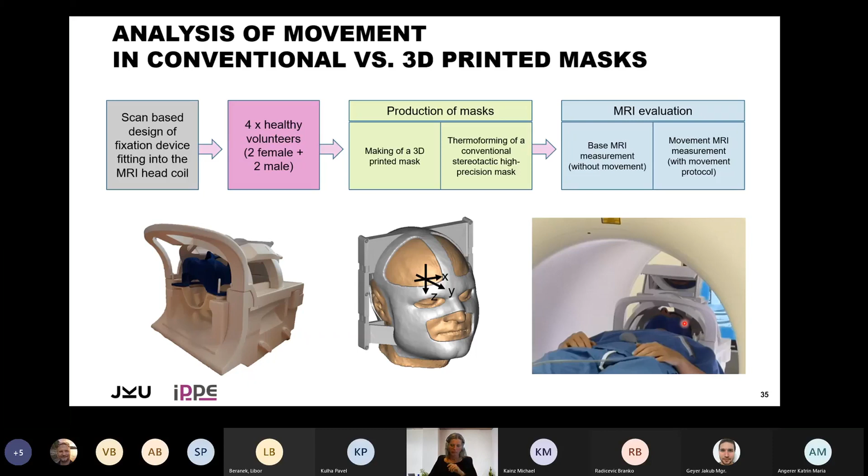Altogether, the whole measurement took around 1 hour. MRI evaluation was split into 2 sections. One was the base MRI, where the proband was told to lie still and not move. Then there was a movement measurement, where over a mirror - here you see the mirror shows a screen - the proband read commands like move left, move right, rotate, and so on from the screen.

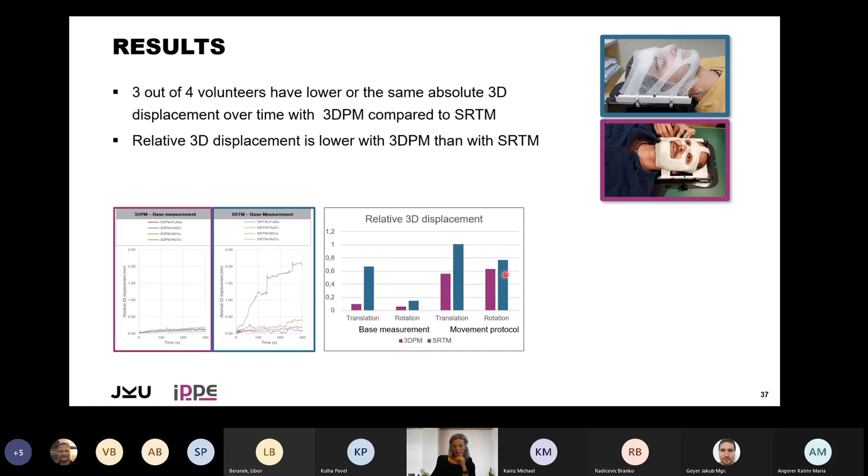Looking at the relative 3D displacement, relative to the average position of the head - again the magenta one is the 3D printed mask - you see the displacement is always lower than for the conventional mask. The same holds if you look at the maximum leeway, the absolute movement maximum over the whole time.

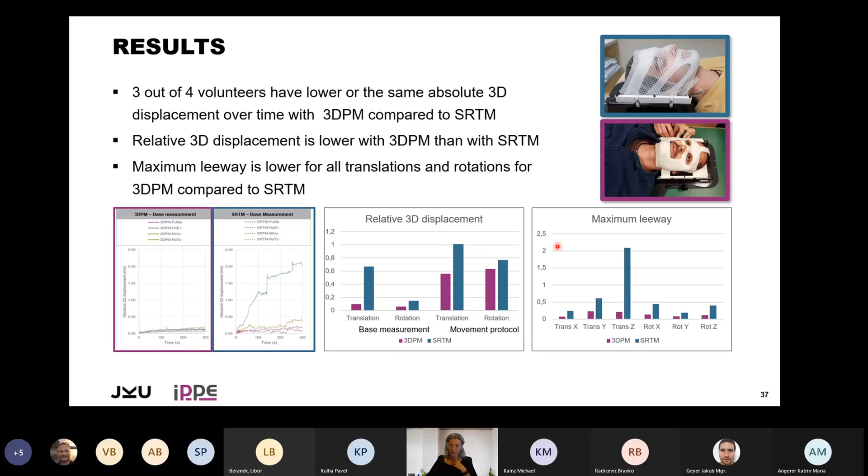Again, magenta, the 3D printed mask, allows less movement than the standard mask. So overall, we could show that mask design based on MRI or CT data is possible. We have the ability to leave eyes, mouth, and nose uncovered. The proband felt it was more comfortable than the currently used mask. However, with only 4 people, we need a lot more participants to use the subjective feedback, and overall it shows better fixation performance than the conventional mask.

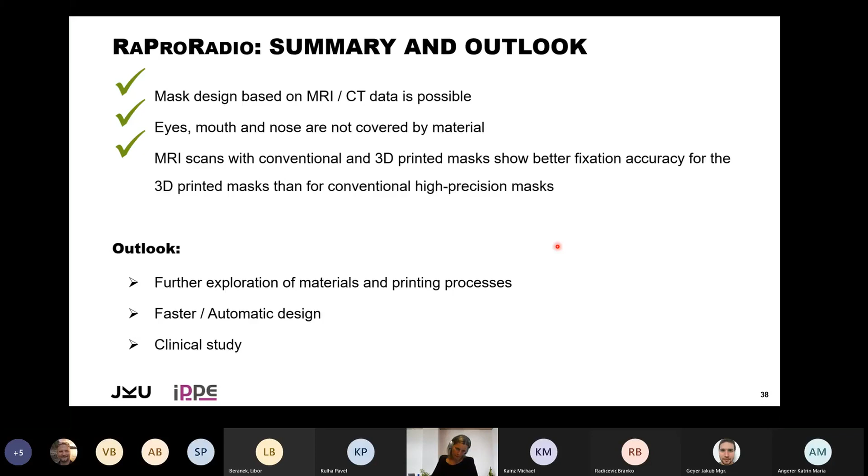Of course, there is always future work to be done, but we move on to the last project I want to show you. It's actually Upper Austria's largest medical technology project, funded by 3.2 million euros, with partners from many disciplines. The project is called MEDUSA, Medical Education in Surgical Aneurysm Clipping, and the main goal is to develop a surgical training simulator for the challenge of aneurysm surgery.

Cerebral aneurysms in the head region have a prevalence of 3 to 4% in the whole population, higher in the elderly. As long as you only have an aneurysm, you can still be fine and might not show symptoms. However, if it ruptures, it's a problem, causing subarachnoid hemorrhage involving the arachnoid mentioned before, which you don't see on imaging data. With a ruptured aneurysm, some patients die directly, some have very strong physical and mental implications, and only a third have the same quality of life as before the bleeding.

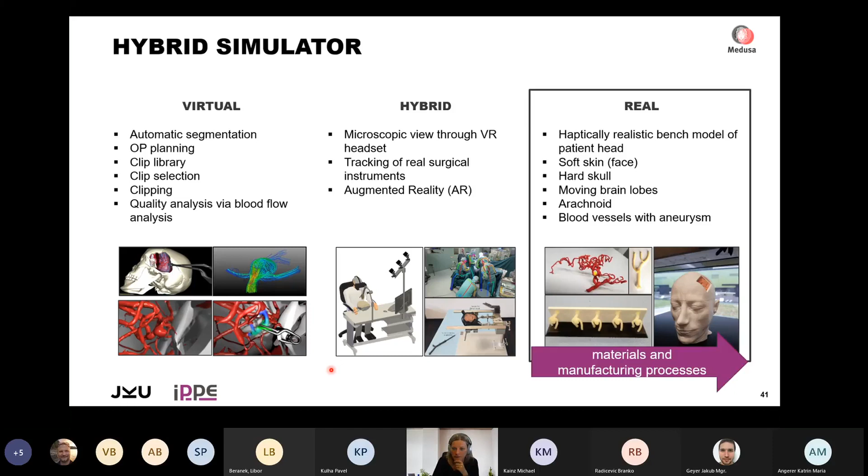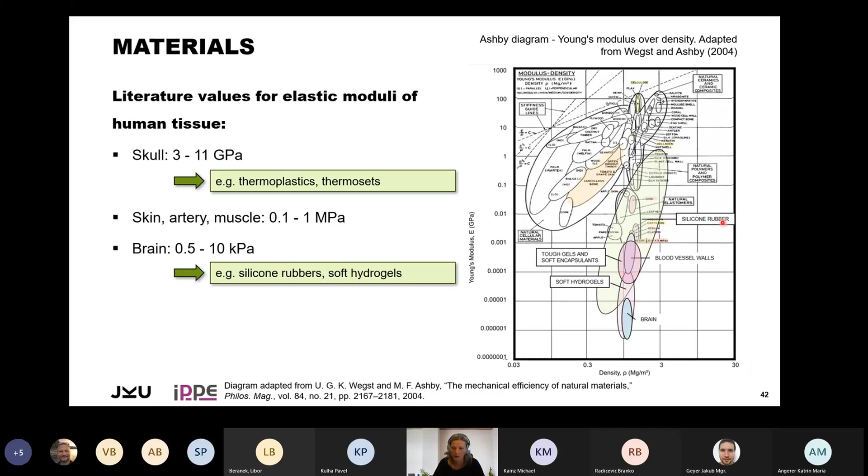And then there's augmented reality to see the real world, with the virtual world overlaid on it. Our institute deals with materials and manufacturing processes for the real models. We did some material analysis, showing Young's modulus over density, and you see blood vessels, with the brain especially being one of the softest materials. As artificial overlaying materials we use soft hydrogels or silicone rubber, which are very versatile in their application.

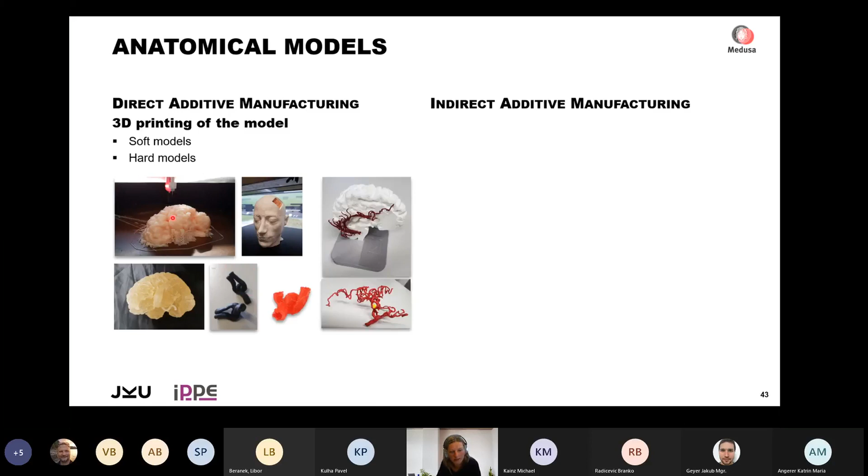And again, we have the separation between direct and indirect manufacturing: the 3D printing of the models. Here we have another division between the soft models - here we see the 3D printed brain model - and some hard models, just to study some anatomy. And 3D printing of molds.

There is fluid injection molding, in this case manual fluid injection molding, to create hollow blood vessels, and manual molding with dissolvable molds. We can use 3D printed ABS, for example, which is dissolvable in acetone, and PVA, polyvinyl alcohol, which is dissolvable in water.

Those were used in this case to create models and then coat them with silicone or latex, creating hollow models for a basic study of anatomy and material properties, and how well the surgeons like the representation and so on.

And then there are also separable molds that you can reuse in the end. The advantages are again the same as mentioned before: individual shapes versus the one shape only with molding, and the number of pieces manufactured.

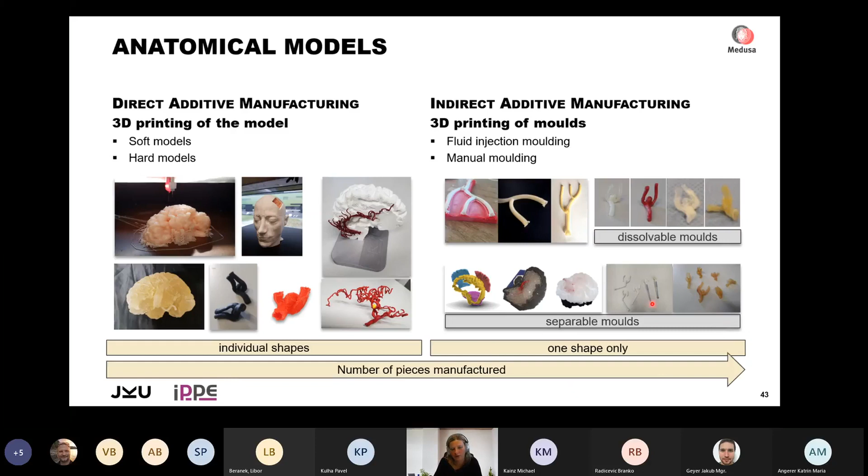In summary, coming to the end, additive manufacturing turns out to be very helpful in the development of medical technology. It can really improve team communication in the project, as when you discuss medical topics with a lot of engineers, it's easier to find common vocabulary by showing a model. Also, prototypes can be produced rapidly - a big advantage in this case.

And to create freeform shapes, or in general parts in low numbers, as we already saw, it's very beneficial. Important - I didn't mention this before - but medical regulations have to be taken into account from the beginning of the development on. Interdisciplinary teams and the participatory design principle really improve the outcomes.

With rising economic importance, high design freedom, and toolless production, I'm sure the use of additive manufacturing will not come to an end very soon, but we'll find a lot of new applications that benefit from this technology.

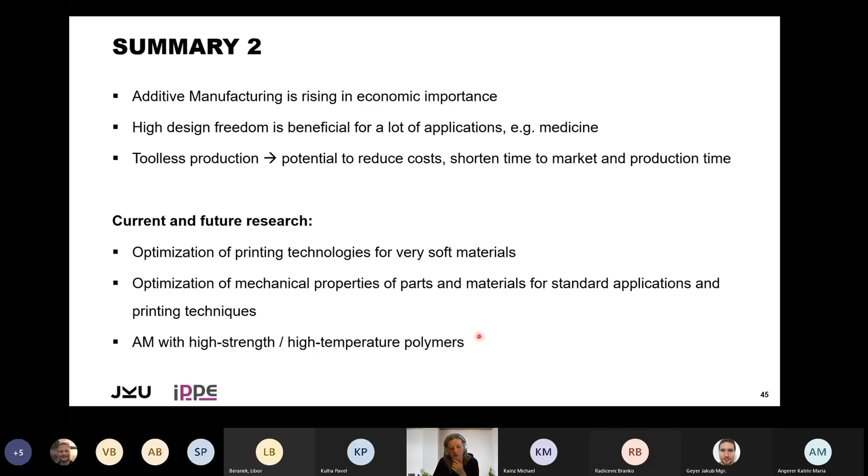I personally see current and future research in this topic in three areas: optimization of printing technologies for very soft materials, optimization of mechanical properties of parts and materials for standard applications and printing techniques - mechanical properties being a disadvantage mentioned in the last talk - and additive manufacturing with high strength, high temperature polymers, which is a very different research topic than for soft materials.